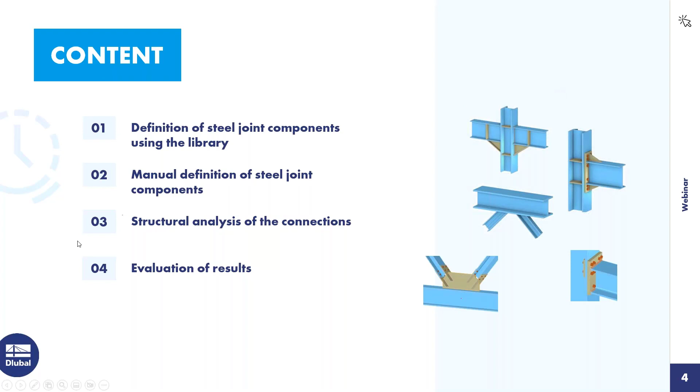Okay, then I turn to the program, RFEM 6. A simple model, a framework, frames in that direction and bracings in that direction, in the X direction.

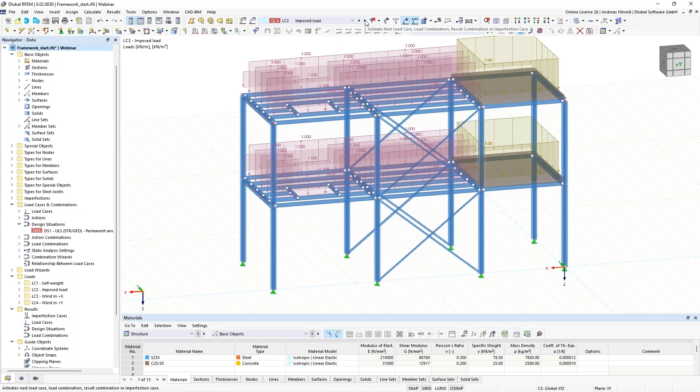We have got several load cases, for example the self-weight load case, then the imposed load, two wind load cases, one in X direction and one in Y direction. And we have got several combinations and a design situation.

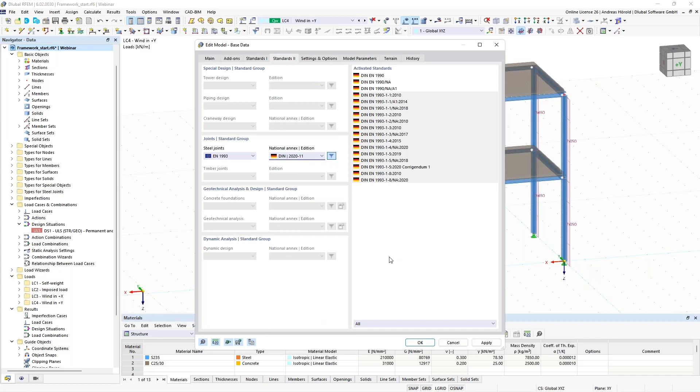So, to design the steel joints, I have to activate the add-on here, left above, under base data. I open the dialog, and under add-ons it's already activated - it's from my test. The standard is also already here for the load case classifications and the standard and national annex, in that case for Germany, for the steel joint design.

Once the add-on is activated, there are two new folders here: the types for steel joints, for the creation of the steel joints, and at the bottom, the steel joints design, the design situations, and ultimate configurations. I will show you that component, the ultimate configuration, in the next dialog.

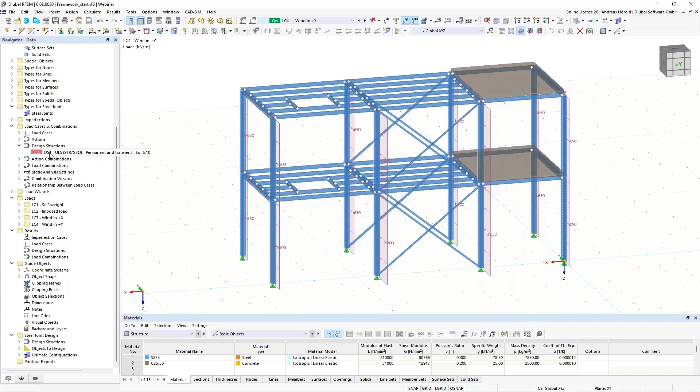But before I do that, I go to the design situations. You can see again the load cases here, the actions, and the design situation. It's important that if you activate the add-on, it's the default setting that the steel joints design is activated. Just note that it is here.

Okay, and then those are the action combinations and the load combinations. Those load combinations are included in the design situation. You can see that here in the overview.

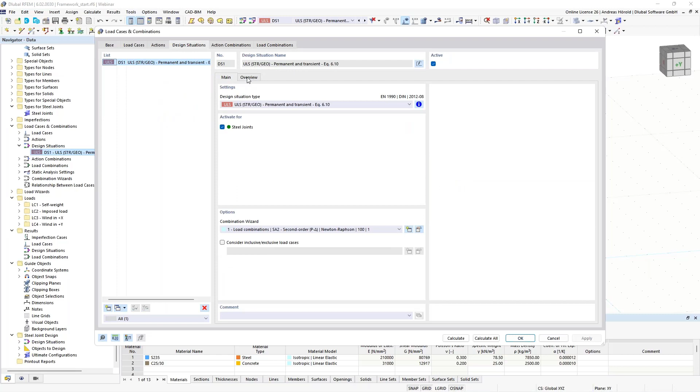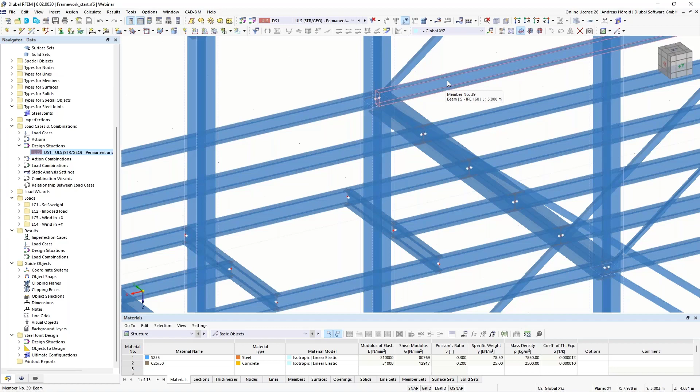So we can leave the dialog and start with the first steel joint. Maybe I can show you that in the model. I would like to use that node here, and I will define all connections for that node: the rigid connection of the steel frame, the pin connection of the platform beams, and the 2 connections for the bracings. Those are L sections.

Okay, let's start. Right click on steel joints on the left side in the navigator data, and I select new steel joint. First I select the joint - the node, sorry. Node 33, and I apply that.

There are 7 members that have got the end or start point in that node here. We can click through them: Member 1 is the platform beam, that's the bracing, the frame or horizontal beam of the frame, the upper column, the lower column, the other platform beam, and the upper bracing. Okay, here you can see the design configuration.

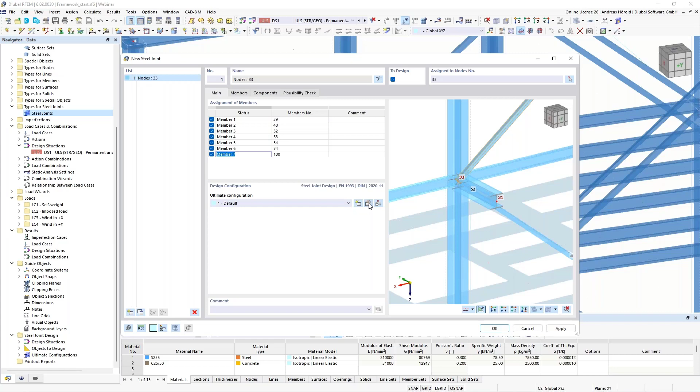I open it. You can perform a buckling analysis. Then you can see the standard settings here, the maximum number of iterations - you can increase that, for example. Then you can also increase the number of load increments; that's the standard setting, limit plastic strain - that's the value from the standard, and so on. I leave all settings as they are, also the safety factors here.

If you want to perform a buckling analysis, you can go to that dialog. You can also increase the number of lowest eigenvalues, number of iterations. That's the limit load factor from the standard - it's 15 according to the Eurocode. Okay, for that connection, I don't do a buckling analysis.

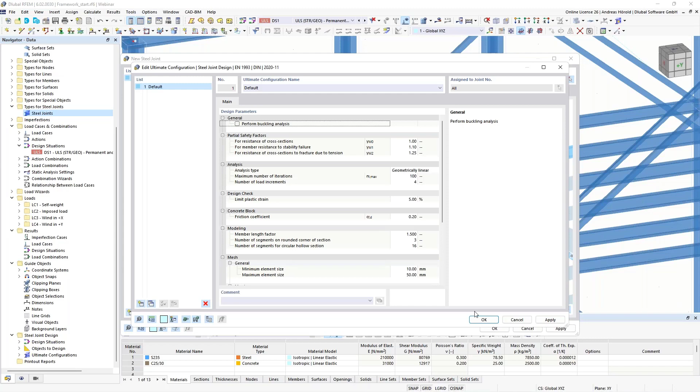Okay, then we go to the next dialog, members. The finite element analysis requires at least 1 member to be supported. I select the lower column. The column is in reality supported here, and I will support at least this column.

Okay, and we define also that the column is continuous. That's automatically overtaken for the 2 columns. So the member settings, you can see here the member settings from RFEM, S235 and the sections, and we overtake the sections, of course.

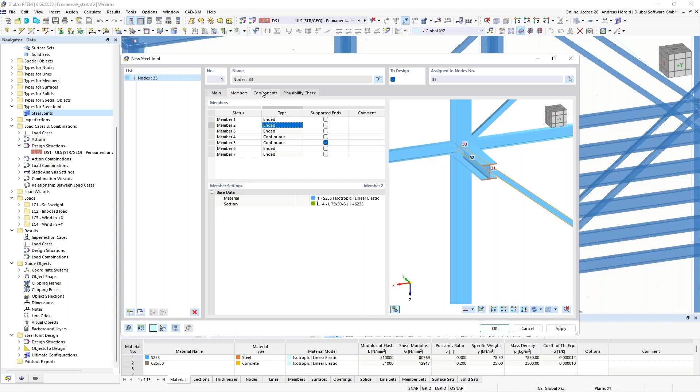So then under components, you can use the library and you can create single components. I open it. You can see 4 categories. The modifications, member cut, plate cut, we will use both of them. Then the plate editor, plate, stiffener, haunch, and so on. Then under connection elements, end plate, fin plate, under others, the auxiliary plane, a help plane, then the welds and the fasteners.

Yeah, that's the current state of that library. We will extend that library continuously. A team of 8 members or 8 employees are working on the development of the add-on steel joints.

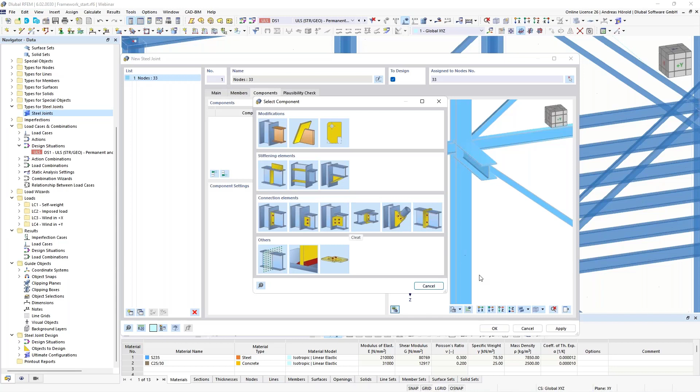We also extend the templates. I go to the template library. So there are also 4 general categories: the rigid connections, the pinned connections, truss, and the bracings. I click through some examples: beam to beam, beam to column, with haunch, such a connection.

If you download the trial version or you already bought the program, you can click through the single components. Maybe cross joint.

I will show you some pinned connections: beam to beam with cleats, fin plate, short end plate, beam to column, the same, cleats, fin plate, short end plate, and so on.

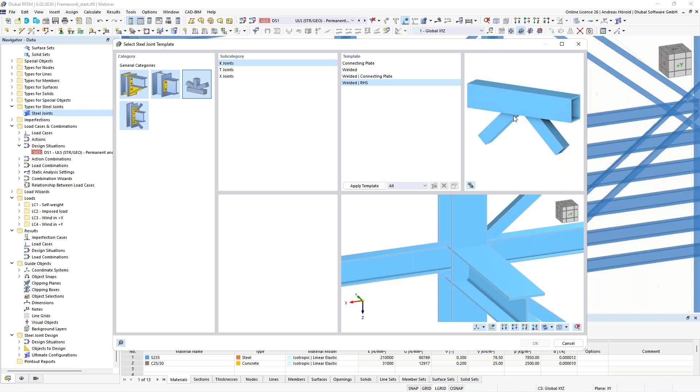Trusses, you can use that for diagonals or for bracings. The K-joint, welded, such a connection. Also for bracings to use welded, it's quite new. The rectangular cross sections with a weld, T-joints, X-joints, and so on.

Then last but not least, the bracings. Similar connection, such a connection. Okay.

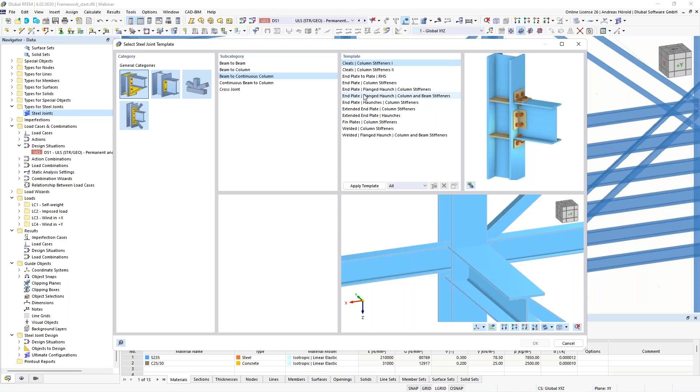But we will start with the first connection, the rigid connection. I use here the category rigid, beam to continuous column, and this one, with a haunch and column stiffeners. If I apply the template, we will see it in the preview here, right at the bottom. And you can see we have to modify that connection. We leave the dialog with OK.

And we go through the single components. So I extend the window a little bit. Okay, so then we start with the end plate. Member 3 is okay. You can see member 3 is selected if it is chosen. Then the reference member is the column. You can see it's selected.

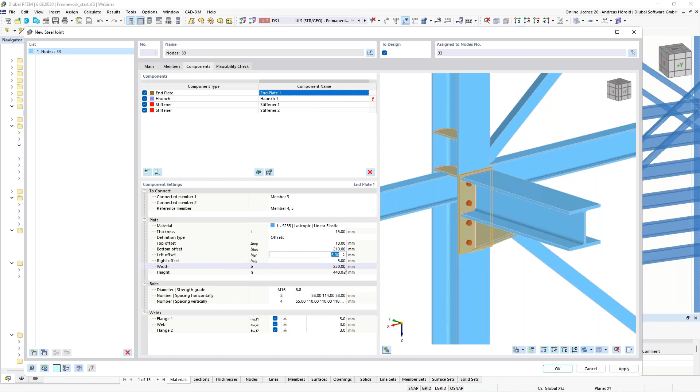We use a thickness of 15 millimeters. Then 210 millimeters. Left offset. We don't need an offset. We say 0. Okay. On the other side also 0. The rest is quite okay.

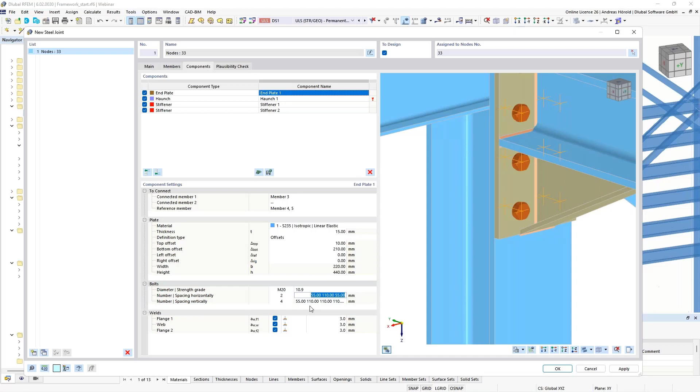So then the bolts, we use a diameter 20 millimeters and a screw strength of 10.9. So then you can use our values here. It's quite okay for this connection. I will only change the vertical spacings. I use only 3 bolts. I only entered the first 3 values: 70, space 95, space 150, and the last dimension is calculated automatically.

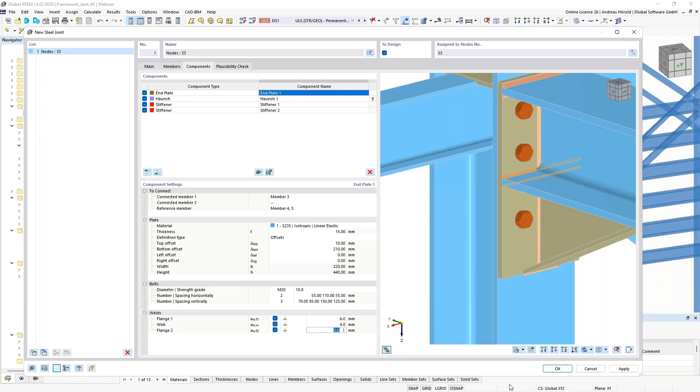Okay, then double fillet welds for the flange, 6 millimeter, then 4 millimeters, and also 6 millimeters. Okay. Now, but you can see we have to modify the haunch. That's the next step.

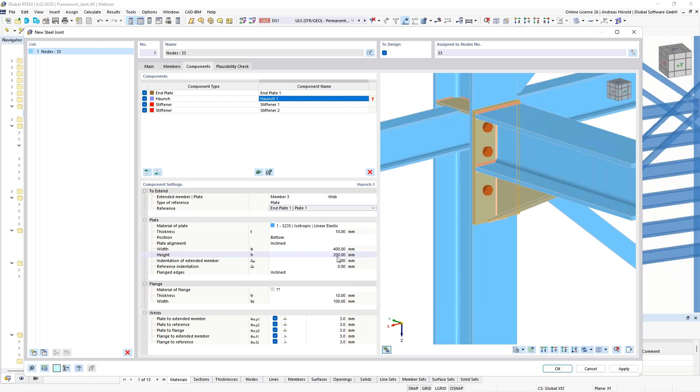So member number 3, that's okay. So then plate is also okay. And plate 1, that's okay. So the other values are also quite okay. I decrease that value. Okay, and you can see now it's okay.

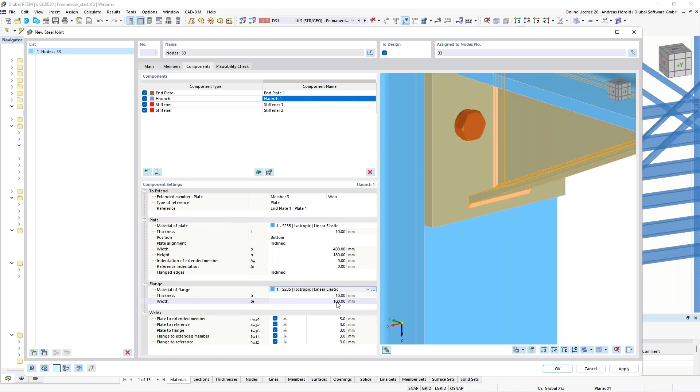So then I have to define a material for the flange. We use also the S235 steel. So then the width can be larger, 200 millimeters in that case. Okay.

So then the welds, that weld here, you can see it's selected, 4 millimeters. Now we can leave the double fillet weld. Then this weld also, the double fillet weld, 4 millimeters. Then plate to flange, this one, also 4 millimeters. So then the flange extended member.

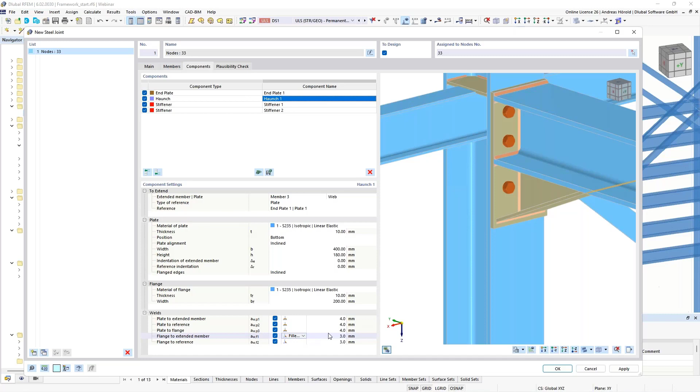Now this one, we use another weld, a butt weld on the rear side. And for this flange to the reference, for this weld, we use a double fillet weld, 5 millimeters.

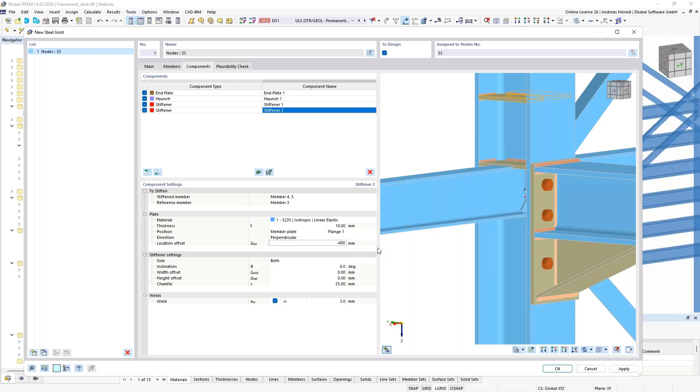So the haunch is quite okay, but the stiffener is not. That stiffener should be adjusted. Let me check the values. I only defined a weld of 3 millimeters, but we have to move the upper stiffener here. So the value is minus 400. And I've also got to change the weld.

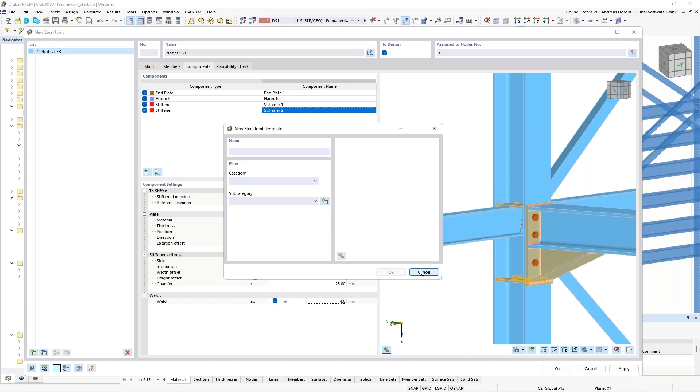Okay, the rigid connection is finished. It would be possible to save it as a template, for example, to use it for the other rigid connections for the frame, on the edges of the framework. Then you could press this button, save component as template. You can give it a name, select the category and subcategory, and so on. I don't do that.

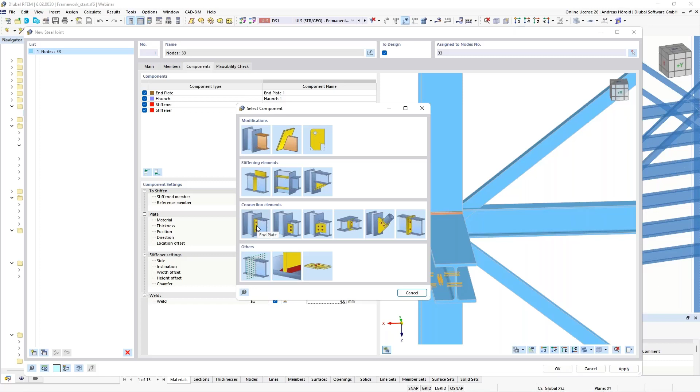I continue with the connection of the platform beam, these beams here. So I use a component at the end, an end plate, this one. Connected member is member 1, this one. The reference or other connected member is on the opposite side, member 6. And the reference member is the column, members 4 and 5. Now you can see the end plate.

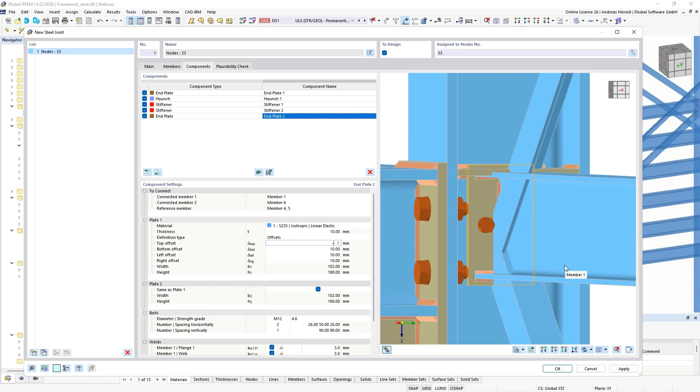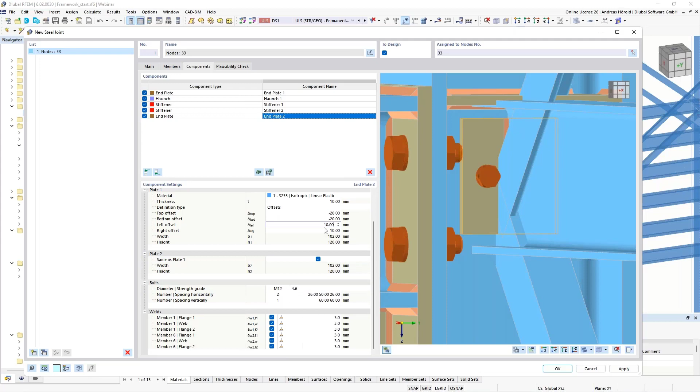Same material. I decrease that value here. Now we don't want to connect the flanges. Also on the lower side, minus 20. Okay, the rest is quite okay. The opposite plate should be the same, it's on this side, you can see it here.

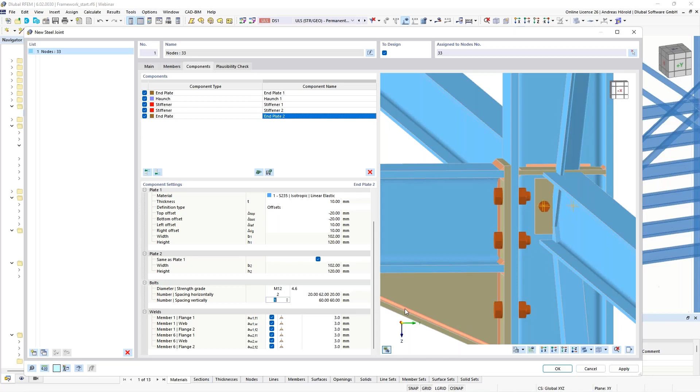So then bolts M12, it's okay. 4.6 as screw strength, also okay. Then I enter the value 20 and the rest is calculated automatically. Then I also use 2 vertically and enter the value 35.

That's good, so then we turn to the welds. We don't connect the flanges, that's why we deselect our flanges. Only the 2 webs should get a double fillet weld, and the value is 4 millimeters.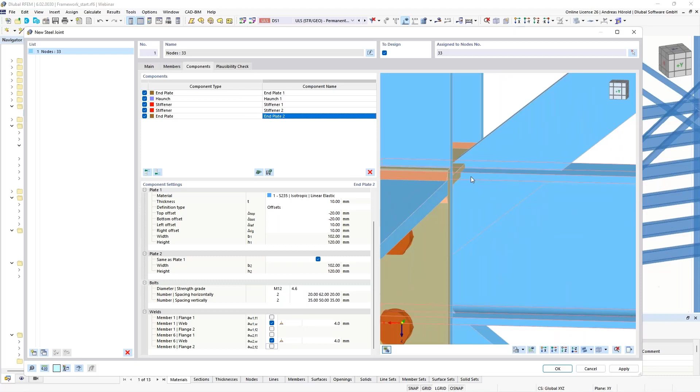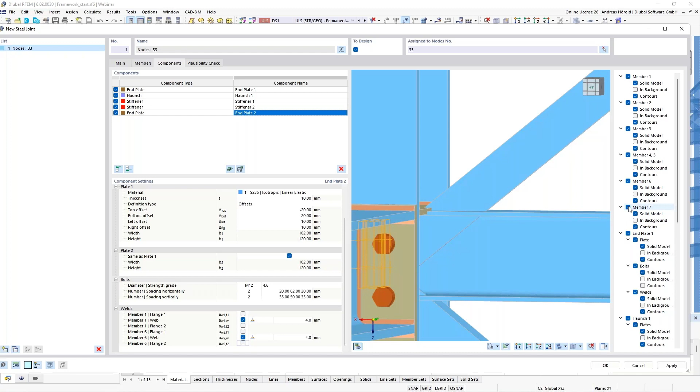So now the 2 end plates are finished. Not yet, sorry, we have to add a cut here. It's in conflict with that plate, the plate of the rigid connection. To get a better overview, with this button at the bottom, I deselect member number 7. Now it's better to see, I think.

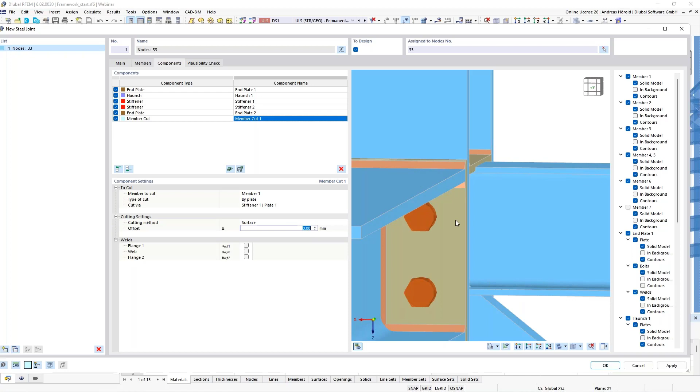So I add a member cut. Which member? Member 1, by plate. And cut via stiffener 1, plate 1, that one here. Surface with an offset of 15 millimeters. And now you can see the cut.

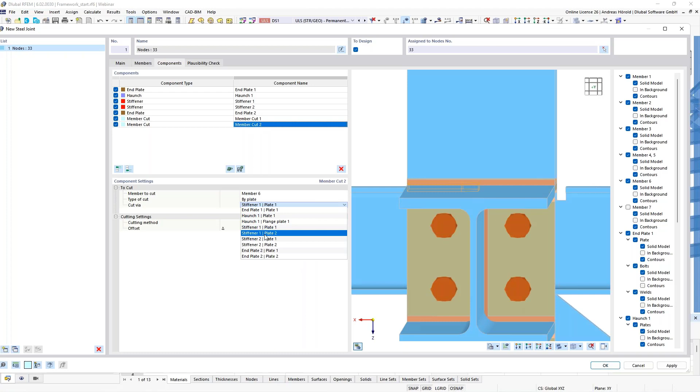To have it on the opposite side, I can copy that, that's also a new feature. By right-click I copy the components at the end, only this one component. And I have to define another member, in that case member number 6, the left side. And the cut is via stiffener 1, plate 2. So you can see it.

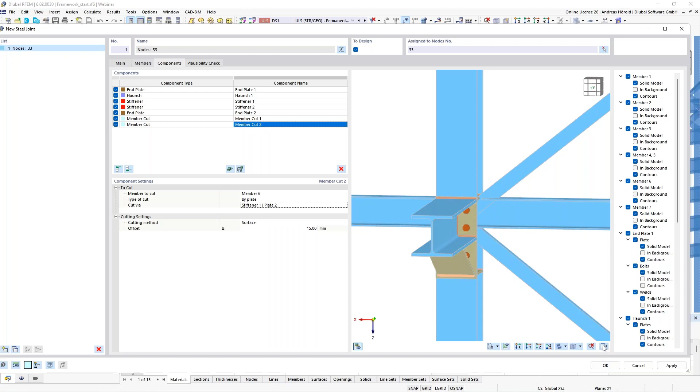So now the rigid connection is created and also the pinned connections, and we continue with the bracings. I select number 7. I can close it to have a better overview. Since we haven't got this component that I want to use in the library, I have to create it with the single components. It's a little bit more complicated, but you can see that it's very flexible. You can define almost all connections with the single components.

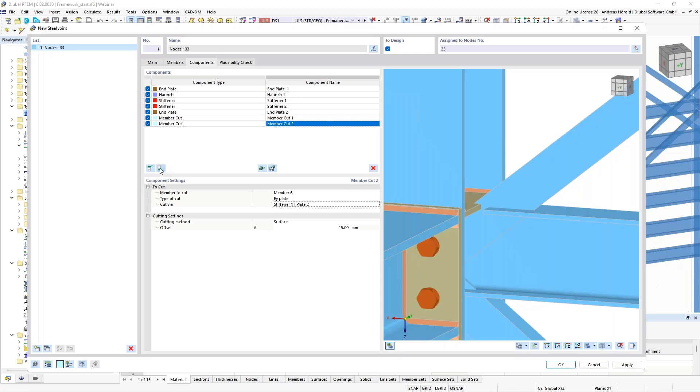So I start with a plate, stiffening elements, plate. The material is S235 again. The thickness should be 8, then 250, and 170. And the position should be a member plate. And that's member number 7 and leg 1. Now you can see it in the preview on the right side.

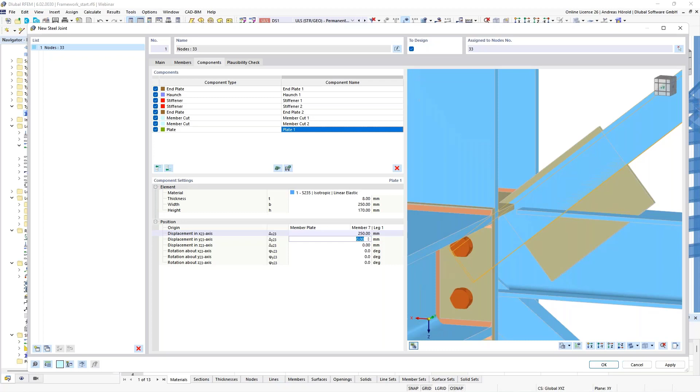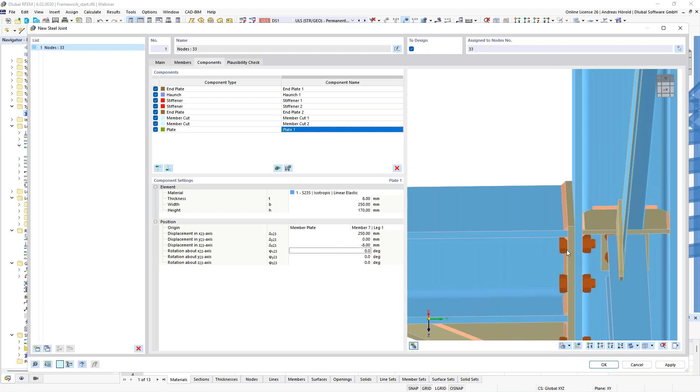Okay, but I have to move it a little bit, I use 250. And to have it on the side of the leg, I enter here minus 8, that's the offset of 8 millimeters. And you can see now it's not in the axis of the platform beam. That's the difference between the static model and the connection model. The axis of the L section is here, and the axis of the horizontal beam here, and the plate now has an offset.

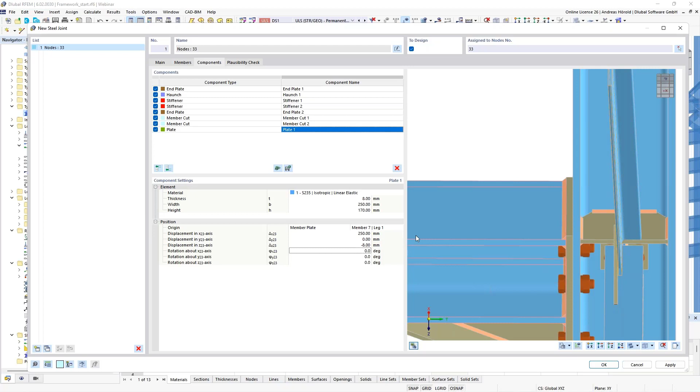You can avoid that if you define an eccentricity for the bracing in the RFEM model, or you can ignore it for the steel joint design. I ignore it for the steel joint design. It's up to you how to use it. That's the difference between the axis model in RFEM and the detailed connection model.

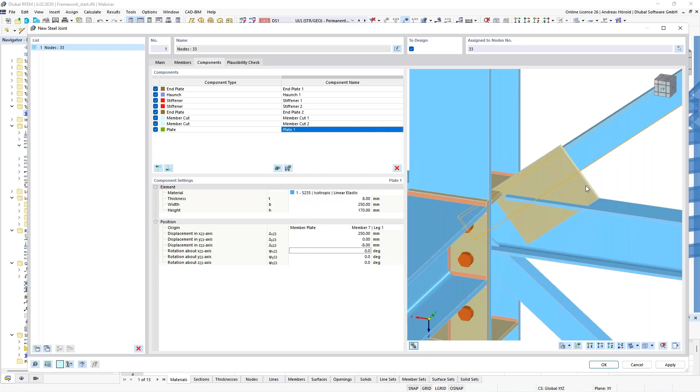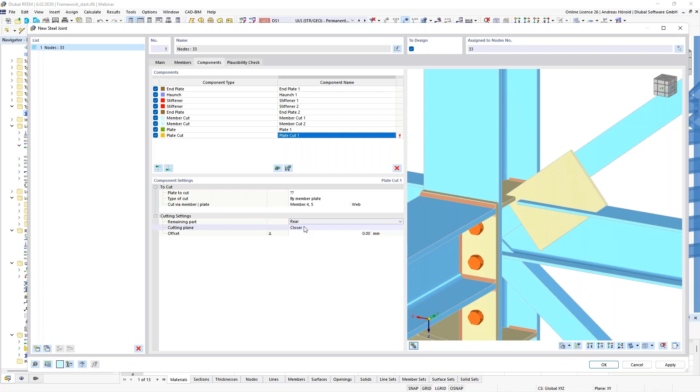Okay, the plate is not finished, we have to enter cuts. I enter this plate cut. The plate is number 1, by member plate. For the cut via, I select the column, and the web of the column should be the reference point. Okay, the rear side, closer end is the cutting plane. So we can do it step by step.

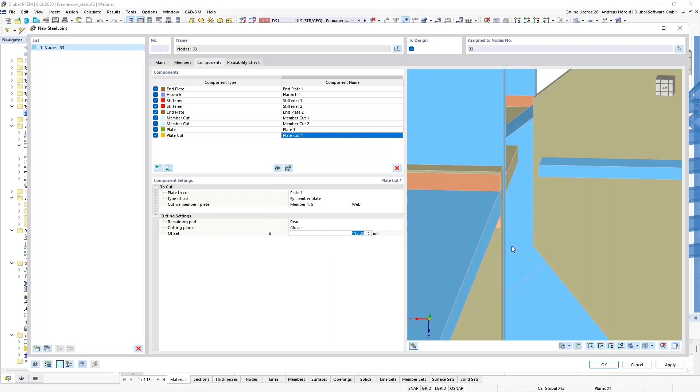No, that doesn't take the plate number 1. Okay, you can do it step by step, or calculate which is the right place. I would like to have the plate cut here at the end of the member cut, and that's 120.25.

Okay, this cut is quite okay. We enter a new cut.

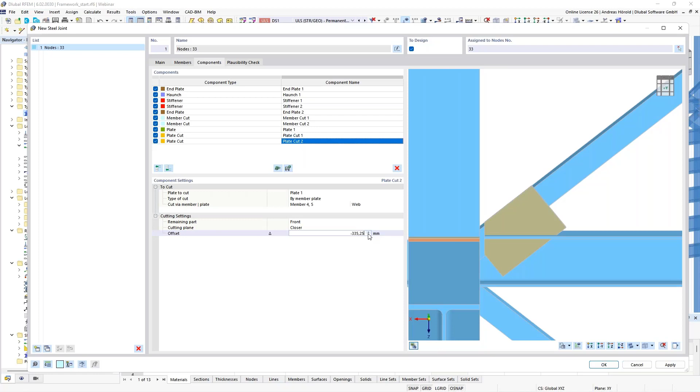So again, plate number 1, by member plate, that's the same again. Member 4 and 5, and the web. That's the reference point. Front, the closer end, and I enter minus 335.25. Okay, only one cut is missing.

Plate cut. Again, plate 1. So now by member plate, and this time member number 1. You can see it's selected. And the upper flange, flange 1. Okay, the rear side.

Yeah, and that's all. I only have to enter a double fillet weld of 4 millimeters.

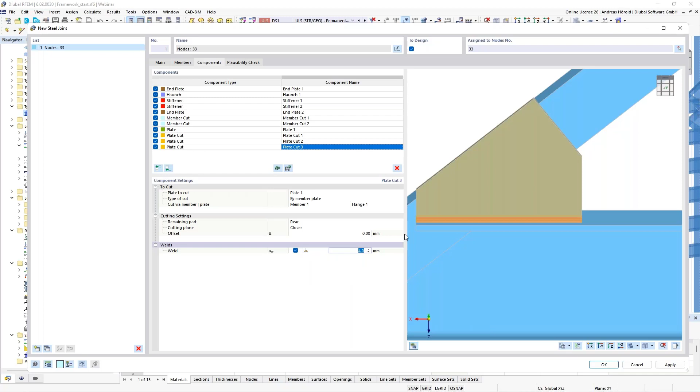So now we have to cut the member. Now you can see it's in conflict with the other parts of the connection. So I enter the next component.

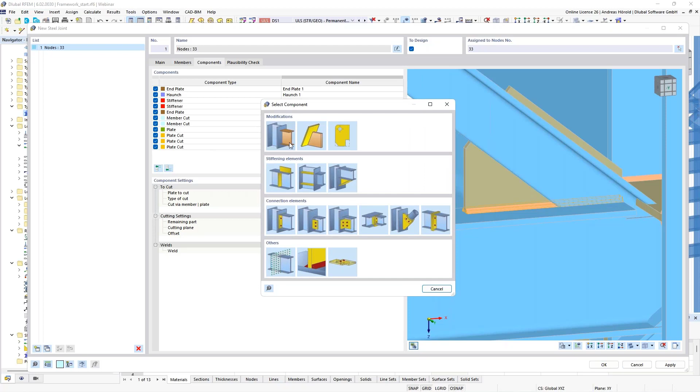Here left above, a member cut. The bracing is the member number 7. By member number 1, that's the platform beam, the horizontal beam.

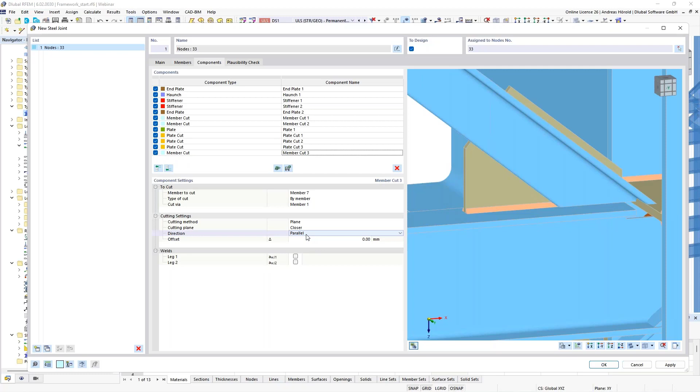Then it shouldn't be parallel, but perpendicular. And a small offset. Okay.

So now we have to define the bolts, meaning fasteners. I add the component fastener. The component is member plate, member 7, leg 1. The other component is the plate number 1.

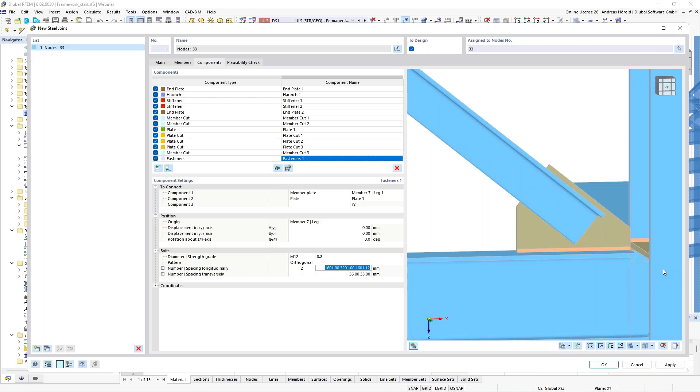So that's okay. M12, I use another screw strength, you can decide by yourself. I, for example, use 8.8 this time. So, and that's the distance from the crossing here: 300, then space, and the distance between the screws or bolts should be 40. And that's all.

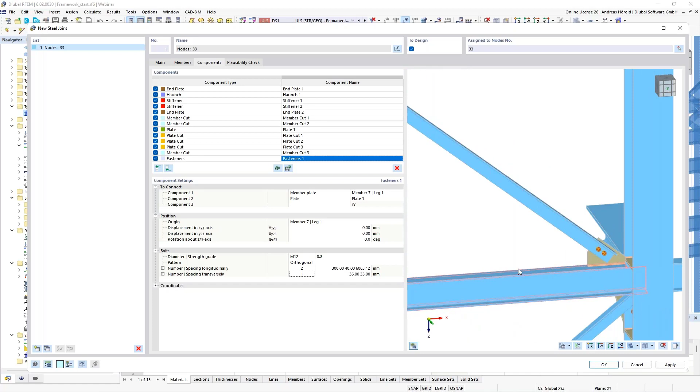And now the connection for the upper bracing is finished. For the lower bracing, we use the same function. I copy that. So I copy the last 6 components. I select all, then right click and copy components at end. So now it's the same connection, and I have to modify it.

So that's plate number 2, I start with plate number 2. I only define here another value, member plate, but this time another member - member number 2, the lower bracing, and leg 1. I hope you can see that it is selected. Okay, then those values are almost okay, 90. Okay.

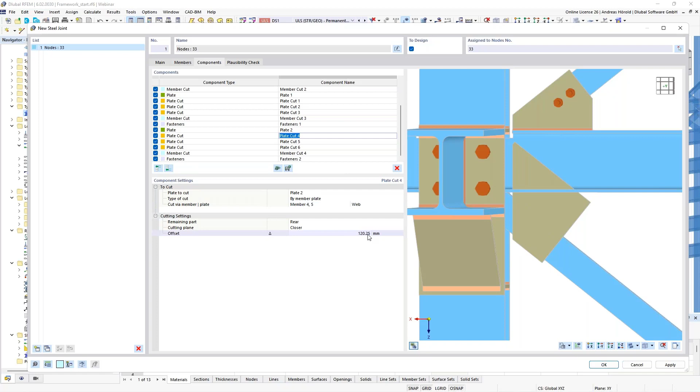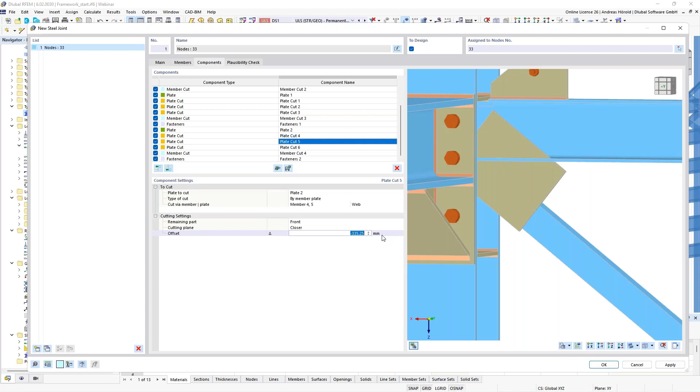So then plate cut 4, I use another value. Yeah, you can see the 45 millimeters are okay for this connection here. Plate cut 5, that's also okay. Minus 265.

And only this plate cut here, the flange is missing. Flange number 2, the lower flange. Then the front side. Well, and that's all.

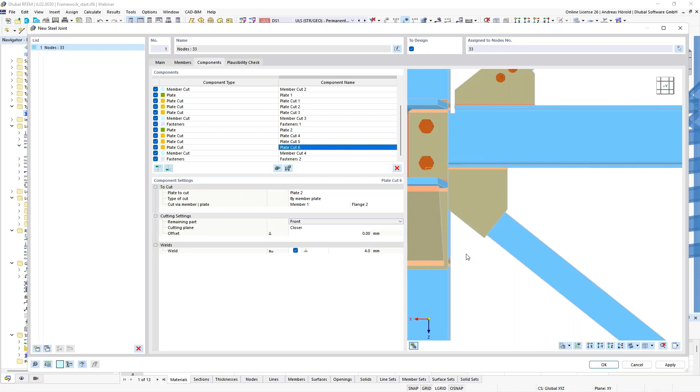So then the member cut, I rotate it a little bit, but you can see all. This time member 2. Yeah, and that's all.

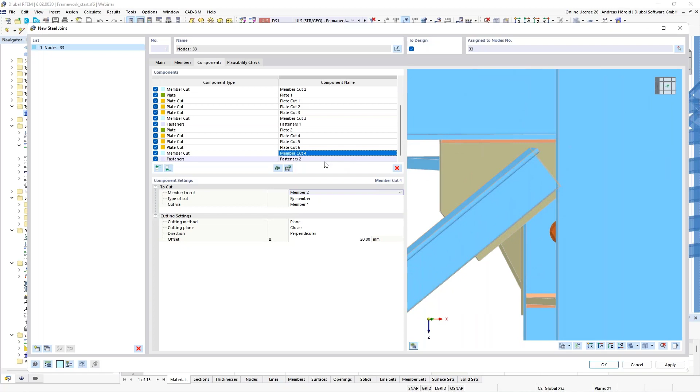Only the fasteners need to be modified: member 2, leg 1. So, and 200 space 40, and that's okay.

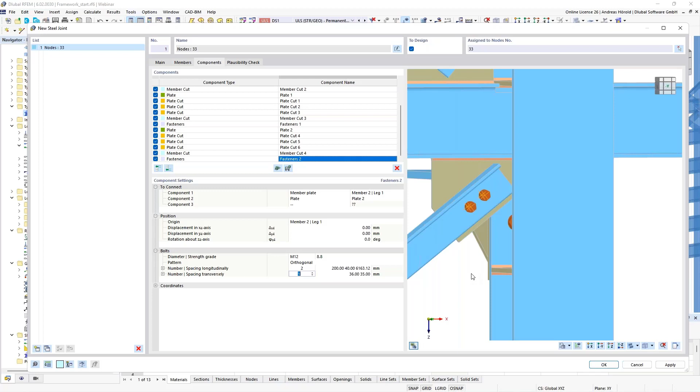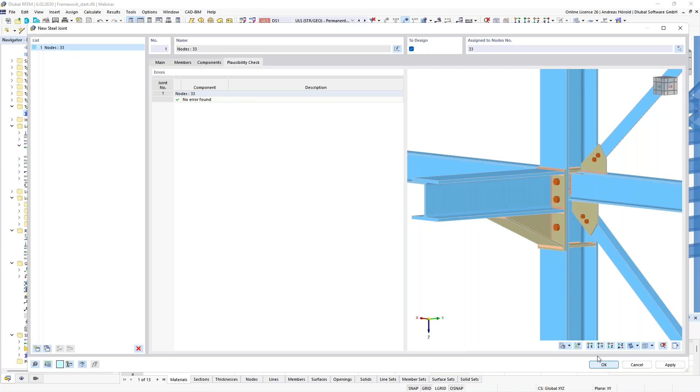So you can take a look if everything is okay, and you can do a plausibility check. Yeah, no errors found. Now that's quite good. Okay, I leave the dialog, and you can see the connection in the preview.

If this button here right above is activated, you can also activate no joint model or simplified joint model. Now I will use that.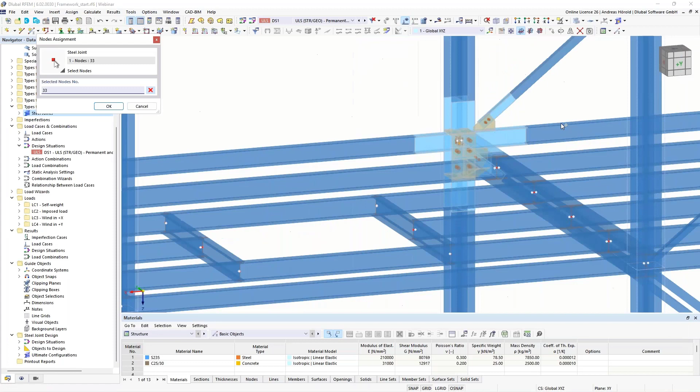So, and now I can also use that connection for the other 3 nodes here. So I can, for example, open the dialog by double click on the connection, and I can select the other 3 nodes. Okay, so I apply it. And now we have got 4 connections, 4 similar connections.

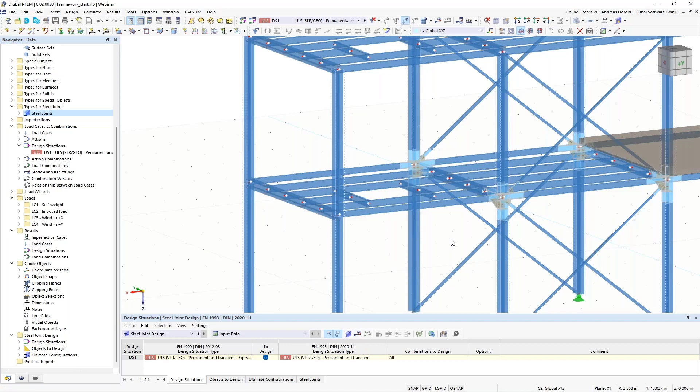So then we can open in the table here the steel joint design, and if I press that button here, the calculations would start. I skip the calculation - the calculation time is about 15 minutes on my computer. I skip the calculation time and I open the calculated model.

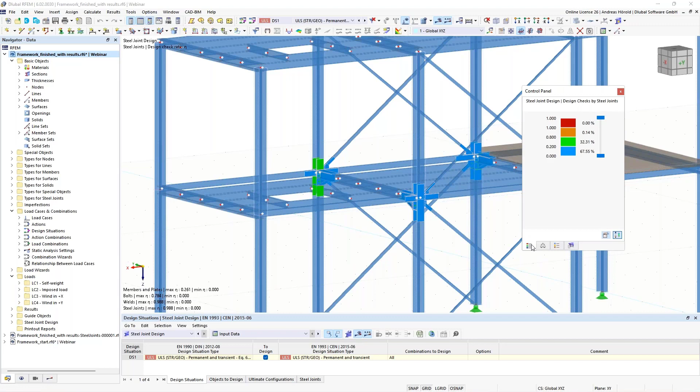I open the panel, and you can see the ratios here graphically. That's the connection with the highest ratios. I go through the table, steel joints, stress strain analysis. You can see the design ratio by design situations, by loading, by joint, by node, by components.

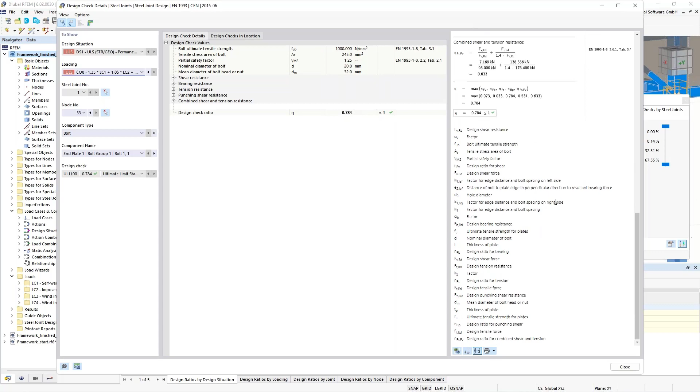If you go, for example, in that line here and open the design check details, you can see all formulas from the standard for the bolts, also where you can find the formulas in the standards, and so on. You can also switch between the designs here, plate, weld, the welded design, and so on.

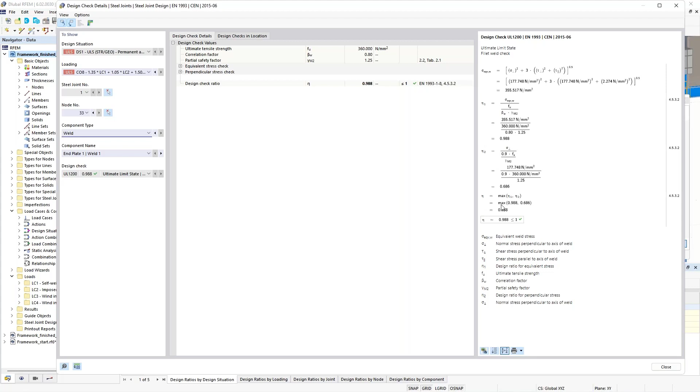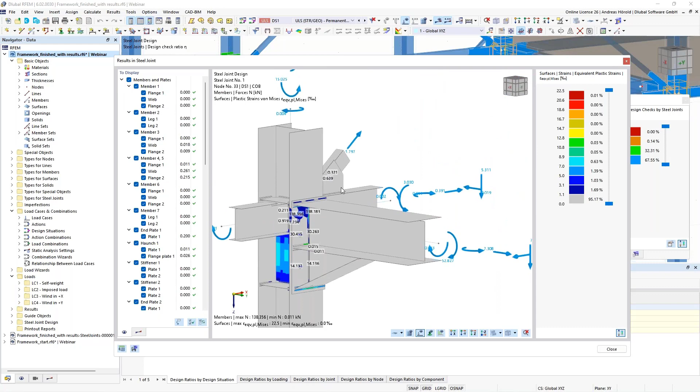Then when you click that button, the results in steel joints, you can see the detailed model. So it's the whole connection. You can see the ratios here graphically.

The gray area is a new feature for values that are not of interest, for example very small values. You can click through the single components, deselect, for example, the members and plates. Now we see, for example, here the welds and the maximum design ratios. And you can go through all.

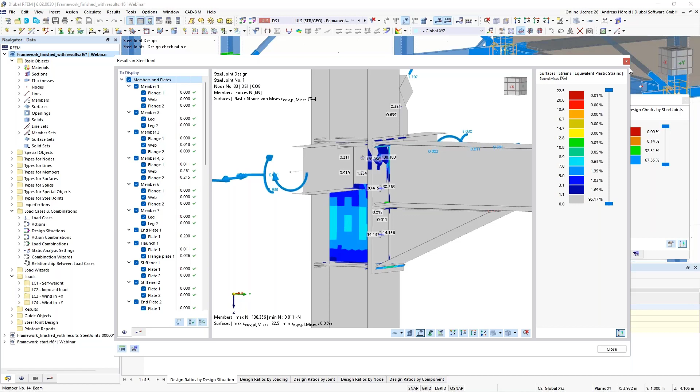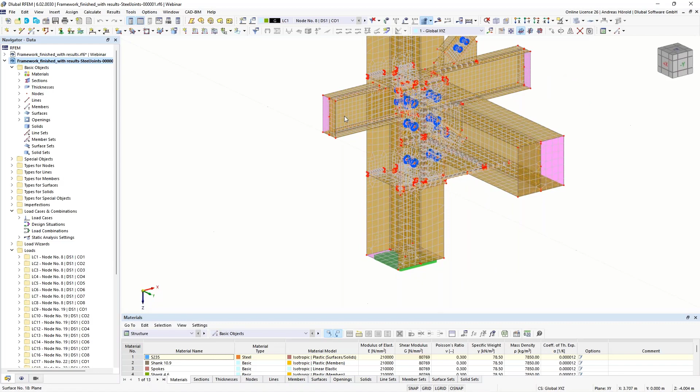So then you can save that submodel here with that button left at the bottom, and open it. That's the submodel with surfaces, the supporting of the column, horizontal beams as surfaces, the bolts, the welds. You can see a simplified model with surfaces and rigid links here.

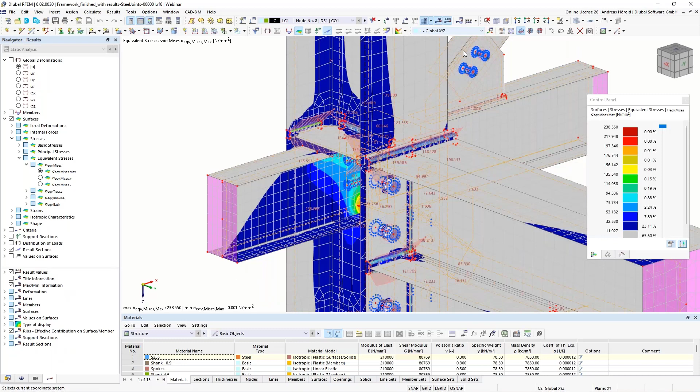Okay, then we can also take a look at the results on the surfaces. For example, here surfaces equivalent stresses, the sigma max Mises. You can add dimensions here, and print it in the printout report. Did I forget anything? Well, I think no. That should be all for this connection.

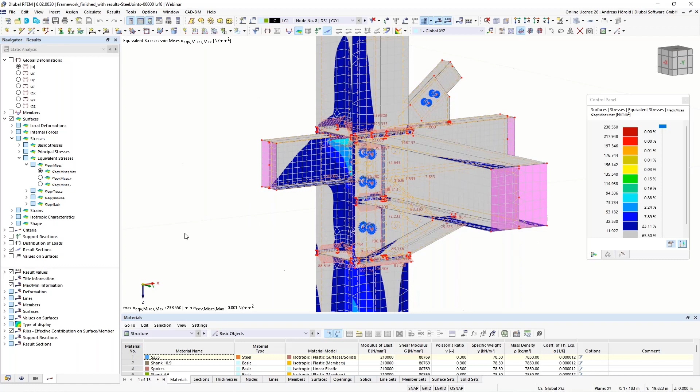I switch to another RFEM window with other connections that we already prepared. You can use the plates behind the flanges here for such a rigid connection.

Quite new is the welded connection of rectangular hollow sections. You can see where the weld on the fillet is missing. We are working on it. At the moment you are on the safe side, only the straight components are connected. We are also working on the implementation of the round hollow section, and when we release it, I think the welds on the fillets here will also be ready.

Also such a connection. Then other connections are, for example, the diagonals for a truss. Here's another connection. It's not practical to use different connections on one truss, but we would like to show the different options in that model here.